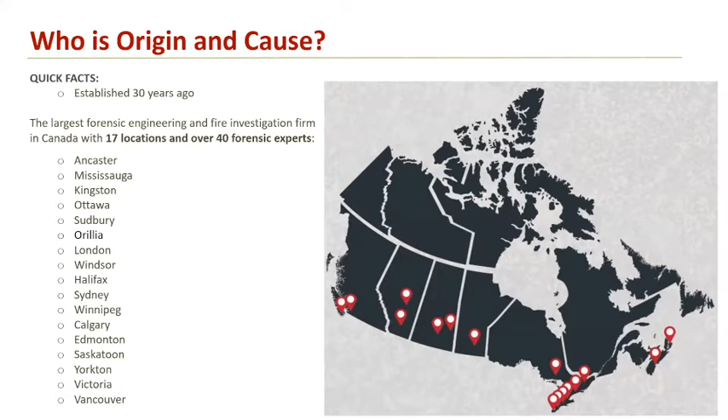I want to quickly cover who Origin and Cause is for folks that haven't used us in the past, or have used us every once in a while. Essentially, Origin and Cause celebrated our 30-year anniversary this year. We're the largest forensic engineering and fire investigation firm in Canada with 17 locations and over 40 forensic experts. You could see those little geo pins on the map as to where we have offices. And we provide services across major engineering disciplines: fire and explosion, structural engineering, materials engineering, chemical engineering, electrical, mechanical, accident reconstruction, drones, and forensic litigation services.

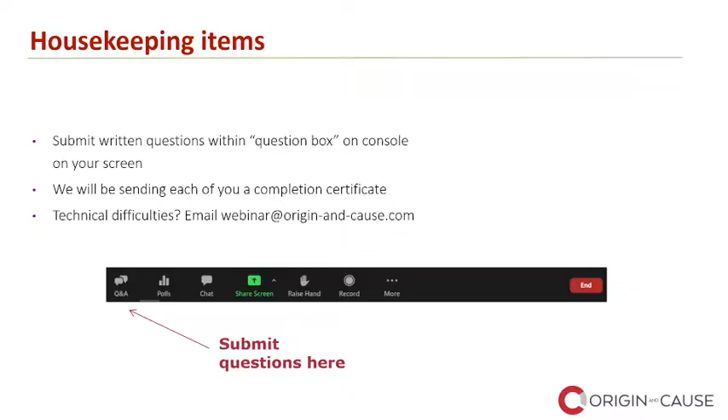Okay, thanks, George. Yeah, no problem. So the first presentation is Forensic Engineering Complex Failure Analysis Investigations.

Do you mind advancing the slide, Dinu, please? So our first speaker is Dinu Matei. He has 28 years of industry and academic experience and has conducted over 2,000 forensic investigations.

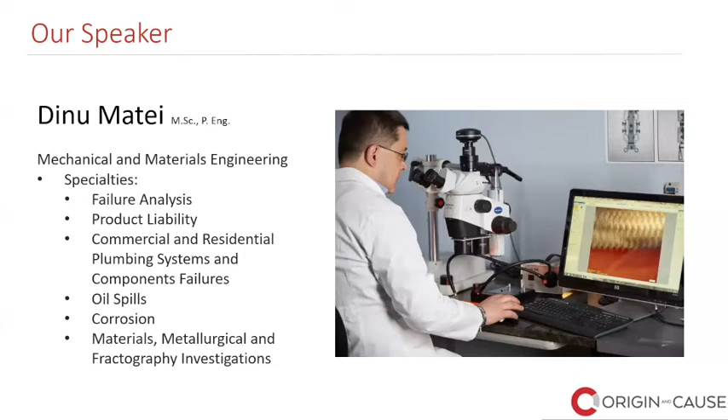Today it will be my pleasure to discuss complex investigations which involve materials failures. Every material, component, appliance, or system is prone to failure. And when it comes to metallic materials, there are only 5 different modes in which they can fail.

Fracture is the separation of an object or material into 2 components under the action of a stress. Fatigue is the weakening of a component or material caused by cyclic loading that results in progressive, brittle, and localized damage. Wear is mechanically induced surface damage that results in the progressive removal of material due to relative motion between that surface and the contacting substances.

Corrosion is the dissolution of the material, which occurs or consists of oxide buildup, rendering the product useless or leading to failure. All metals and alloys are subject to corrosion. The 5th failure mode is creep, also known as cold flow, which is the permanent deformation that increases with time under constant load or stress. Polymeric materials fail in a similar way.

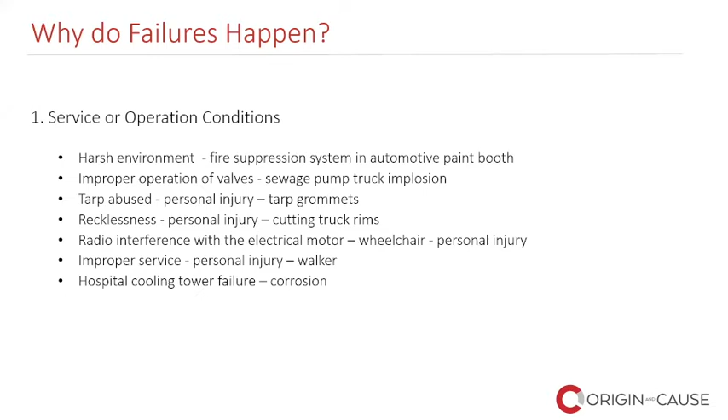A last example is corrosion of a cooling tower at a hospital. The legs were corroded, and the tower was in imminent danger of collapsing.

Improper maintenance. A lot of components need to be properly maintained in order to function properly. A lot of systems need to be maintained in order to function properly. If gears or bearings are not lubricated, they enter into a condition called lubricant starvation, and that could lead to accidents or incidents—for example, wind turbine collapse or crane collapse.

If the bolts of a wheel are not properly torqued, that wheel can separate from the axle.

In a fire suppression system, if the maintenance is not done according to the applicable regulation, that system could fail.

In the case of residential fuel oil storage tanks, if they are not maintained according to applicable code, they can fail due to internal corrosion.

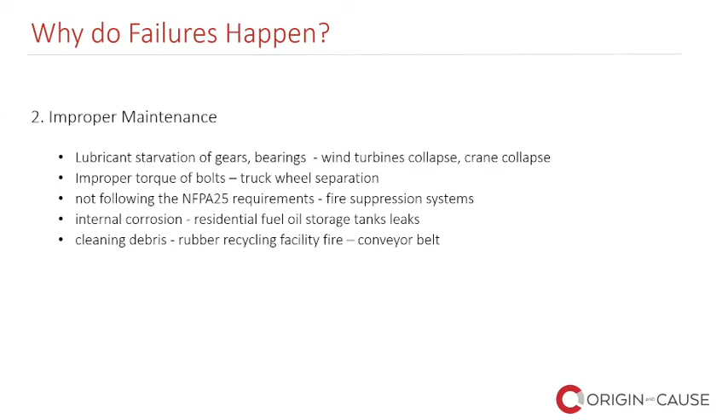An interesting case was a fire at a rubber recycling facility, where the gears from the conveyor belt were contaminated with debris and overheated.

Manufacturing deficiencies—the majority of manufacturers are trying to produce a product which is defect-free, but sometimes deficiencies or defects end up in a product which is available to the consumer.

In this category, I include an aluminum ladder which was purchased from a hardware store and caused a permanent injury to a roofer who fell while climbing the ladder, because the ladder had deficiencies in its castings.

An interesting case, which I will discuss in more detail a little later, involved the collapse of a grain silo spout.

A very interesting and complex case was a commercial pizza oven explosion.

The first time the oven was used, it simply exploded because the stones were made from improper material.

Another interesting case, which was also complex, involved product contamination, in particular chocolate. Long story short, the packaging of the chocolate was not made according to the applicable standards. The manufacturer switched to a different supplier, which provided a package that was substandard. In other words, some of the chemicals used to make the box were not according to the standard.

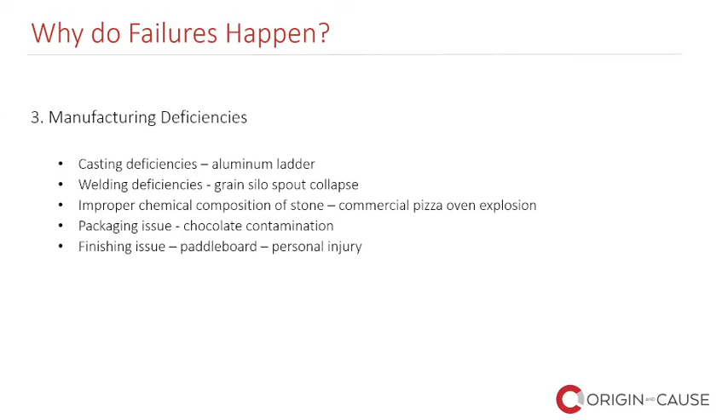A manufacturing deficiency led to another personal injury that involves a paddle board. When the person using the paddle board tried to climb on it, he scratched his chest because the paddle board was not properly finished.

In our investigations, we encountered design deficiencies, and a few examples are a video wall collapse at a theater in downtown Toronto because the video panels were not held together properly. The latches holding the panels were substandard.

We encounter on a daily basis plumbing components and appliances that have design deficiencies. Design deficiencies could lead to personal injuries, like in a miter saw, which was not provided with a safety pin. So the blade dropped and cut the user's fingers.

Another interesting case involving a design deficiency was the collapse of gold mine conveyor anchor bolts, because the load considerations were not taken into consideration properly. The conveyor belt failed.

Installation issues are a leading factor for failures. In case of a fire suppression system, if the system is not properly installed and there's no insulation, or there is a condition which favors the formation of cold air spots, that system could freeze during winter.

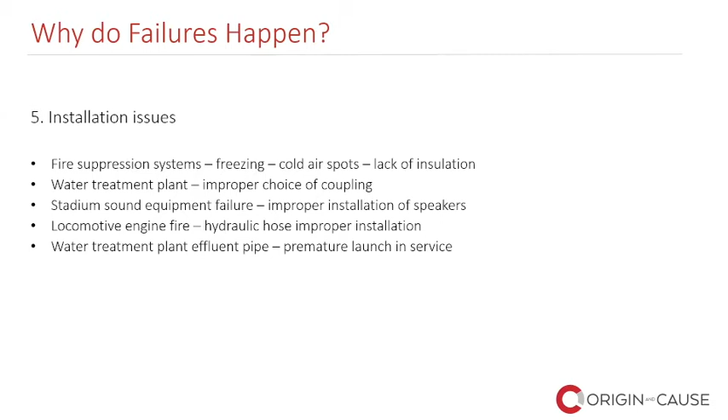And of course, materials and components are subject to wear and tear, especially due to aging. Two examples are a pump used in the food industry, which led to tahini paste contamination. The pump was very old, and particles from the rotors were ending up in the product.

The other example is also a pump, but that pump was associated with oil. Because it was old, the gaskets were brittle and dry, allowing oil to escape, leading to considerable environmental damage.

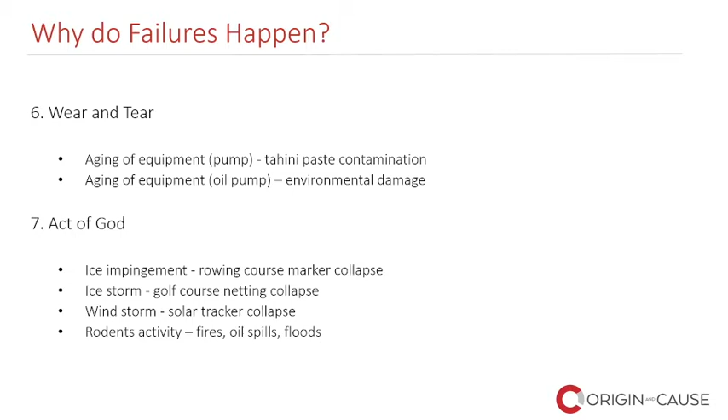And there is the act of God. We have been involved in a rowing course marker collapse due to ice impingement, a golf course netting collapse due to an ice storm, a solar tracker collapse due to windstorms, and we have been involved in fires, oil spills, and floods due to rodent activity.

Some people are negligent or reckless, so their actions could lead to big incidents.

People are leaving their homes at the onset of cold season. They don't turn the thermostat up, or they turn it not high enough. And during winter, when there's nobody home, the pipes freeze, leading to floods.

Oftentimes, when there is a residential oil storage tank located indoors, it is overfilled because the driver who's delivering oil is not paying attention to the equipment.

And we have seen incidents caused with intent, for insurance fraud, break-in entries, or even revenge.

We have seen intentionally flooded homes in order to get money for a free reno project. We have seen orchestrated break-in entries, so people could claim money for personal belongings which were actually not stolen. In a case of revenge, we have seen a gas pipe fitting that was severed with a saw.

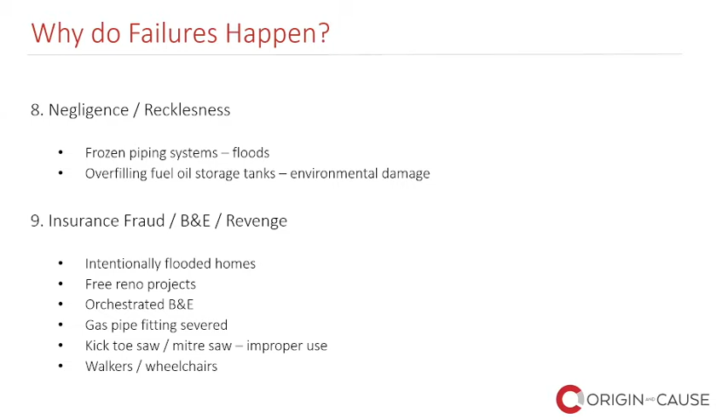And we have seen improper use of tools rented from hardware stores where people got hurt and they claimed that the tool was defective.

Let me take you through a list of important steps a forensic engineer should follow to successfully complete an investigation. Although each investigation is unique, the basic steps are very much the same.

In failure analysis, we say that failure analysis minus analysis equals failure. The basic steps to follow when doing a complex investigation are to gather as much background information as possible: photos from the time of the loss, maintenance records, inspection records, and repairs, if any, in the past.

Try to get an understanding of the circumstances of the event. If possible, interview involved parties like owners, operators, contractors, and witnesses.

Organize your investigation, prepare it and conduct it thoroughly. Make a list with the tasks you have to complete, because you might be involved in a different task and you might lose track of what needs to be done.

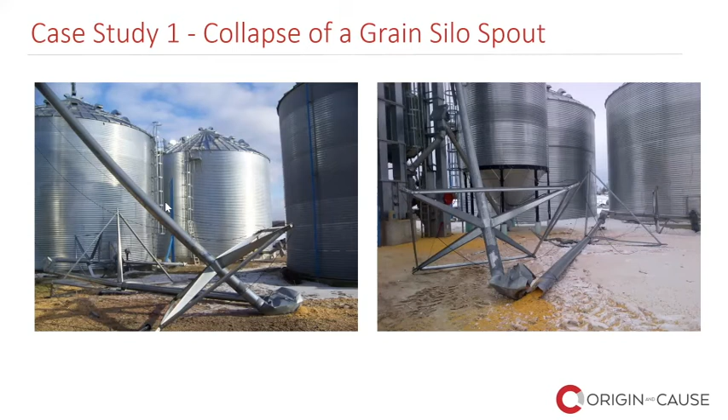In short, a bucket elevator is used to lift grains to a distributor, from which the grains fall through spouts into one or more silos. So actually those spouts are pathways for the grains to be distributed into the silos.

By the time we were assigned to this claim, the weather condition changed and the site condition changed. Most of the components that you saw in the previous slides were removed for storage, so we could not see their layout on site. It must be noted that oftentimes, for various reasons like safety or economical reasons, the site is cleared quickly, and this will make our work a little more difficult.

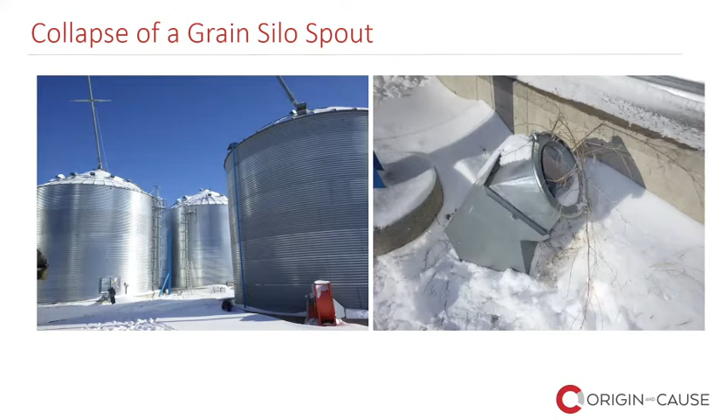The structure was unstable and it was difficult to climb it to see its condition on top. Therefore, we retained the services of industrial climbers, and via radio, I guided them to take important photographs.

Back then, drone technology was not available. However, we have it in our portfolio these days, so in case of a similar incident, we can use our drone to document structures. In these particular images, I noticed a few deficiencies, like crisscrossing cables.

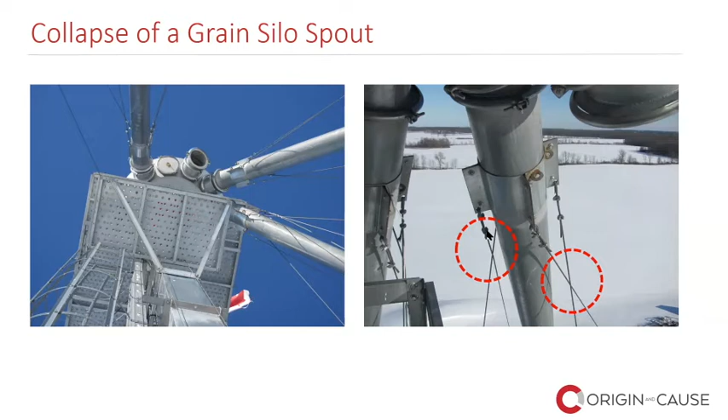And as you can see in the next slide, turnbuckles that are crossing, and cables which are rubbing against the top of the lift.

The evidence was stored in a shed where we had the opportunity to examine it in the presence of representatives from the manufacturer and the installer. The puzzle needed to be solved. The various components needed to be identified to determine how they were installed and what their relationship was with the others.

Following this preliminary examination and identification, relevant evidence was collected and brought to our facility for further examination.

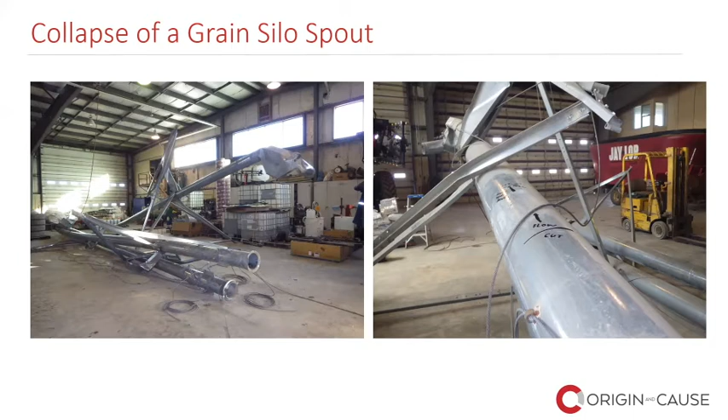One item of interest was a component called a retarder. The retarder is actually what the name says: it's a specially designed box which slowed down the speed of the grains, preventing them from being crushed. So the grains are lifted to the top of the tower and then through the spouts go to their respective silos. If the speed of the grains is too high, then the grains could be crushed.

Each spout was provided with a retarder, which has two pieces of pipe sections welded on each side. The spout was also installed on site using welding, so therefore the retarder has two different welds: one is a manufacturing weld, done at the factory, and one weld done by the installer on site.

It was one of the factory welds that was of interest. You can see by the arrow, this is the factory weld, and this is one of the pipe sections at one of the ends of the retarder.

Together with the other participants in the examinations, we visually looked at the weld and marked locations where samples of interest could be cut and used for further examination.

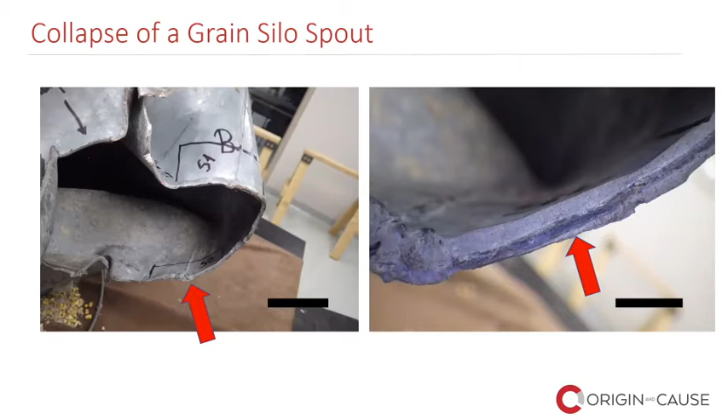Another item of interest was a broken turnbuckle. We wanted to determine whether the turnbuckle was the triggering factor in the failure or it was the effect of the incident.

A turnbuckle, or stretching screw, is a device for adjusting tension or length of cables. They are designed to take only longitudinal loads, not lateral loads. Bending of the turnbuckle in the fracture area suggested that it was subjected to lateral loads. We also noted that the threads were crushed in the section where the turnbuckle was in compression.

In a fractured component, the mating fracture surfaces are usually mirror images of each other. We cut a small sample from the turnbuckle and took it to a powerful microscope called a scanning electron microscope.

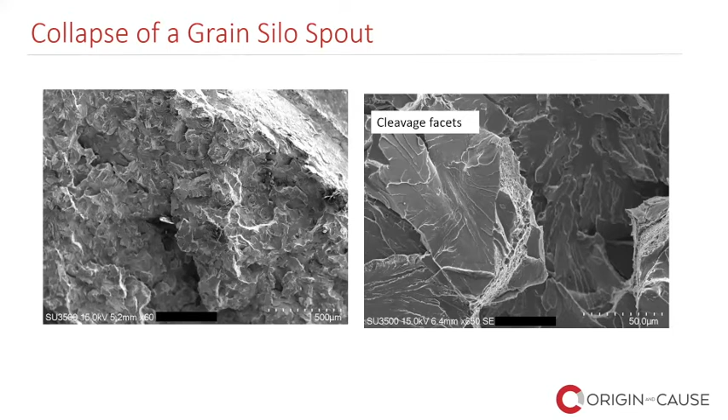Further, we conducted metallurgical evaluation of the turnbuckle in the longitudinal section, and under optical microscope we examined the microstructure. In short, we did not see anything to indicate the turnbuckle was an issue, and we did not see any gross metallurgical deficiencies.

The microstructure was typical for a steel commonly used to make bolts. Chemical analysis indicated again that it's made from a carbon steel, which is also normal for turnbuckle applications. Based on the examination of the turnbuckle and the results obtained, I determined that the turnbuckle was not an issue causing the grain silo spout to collapse.

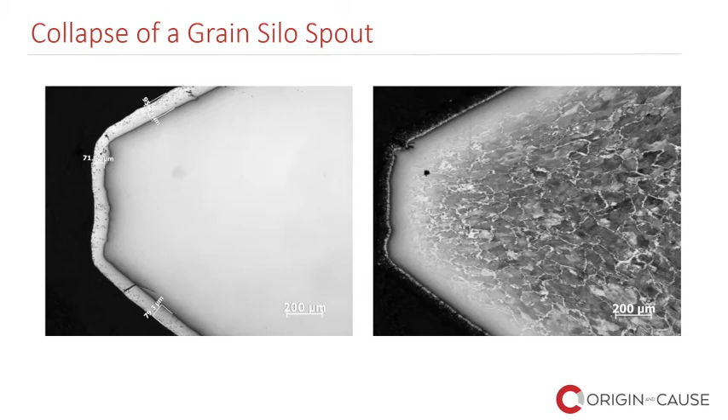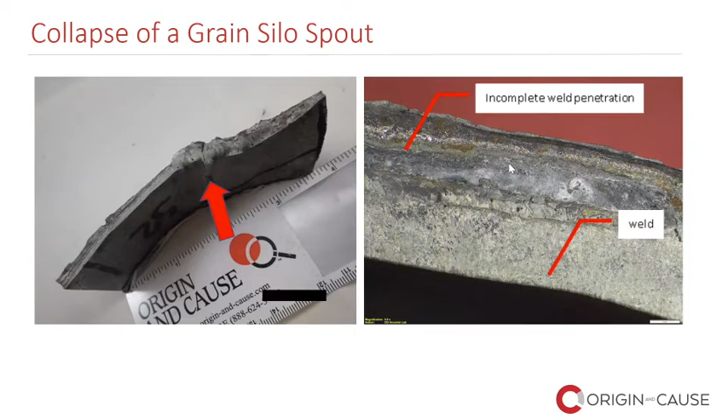As I mentioned earlier, we selected a few weld samples for examination, and one can see with the naked eye there are some problems here. The red arrow points to a large bead, excessive weld bead actually, and the images taken at low power microscope show that the weld did not penetrate throughout the entire wall. So the weld exhibits a deficiency called incomplete weld penetration.

Porosity, not only in welds but in every material, is an undesirable condition because pores can act as stress concentrators and they can reduce the load carrying capability.

Welds are very complex structures, and we analyzed its microstructure and found some porosity. Those black speckles are pores in the weld.

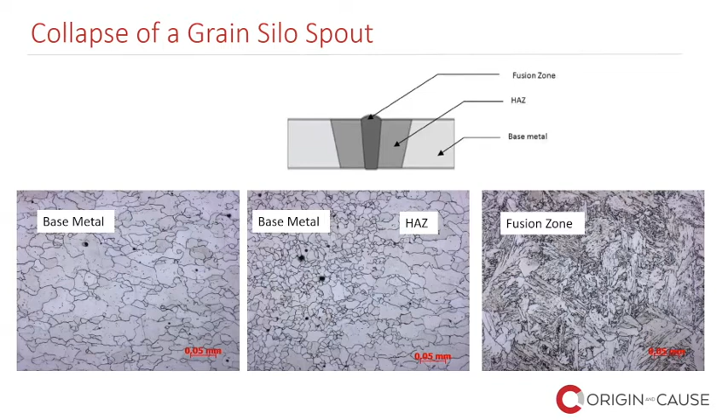Following gathering and analyzing the data, I reached the conclusion that the collapse of the spout was the result of manufacturing deficiencies, namely a substandard weld. There were also other factors adding undesirable stresses to the structure, such as crisscrossing of cables, which was an installation deficiency, and ice buildup due to weather conditions.

However, it must be said that these factors acting alone would not have caused the incident. The main contributing factor to the incident was the substandard weld. And as I mentioned earlier, the turnbuckle failure was not a contributing factor, but the result of the failure.

As far as I know, the matter was settled favorably to our client, which was the insurance carrier for the silo owner.

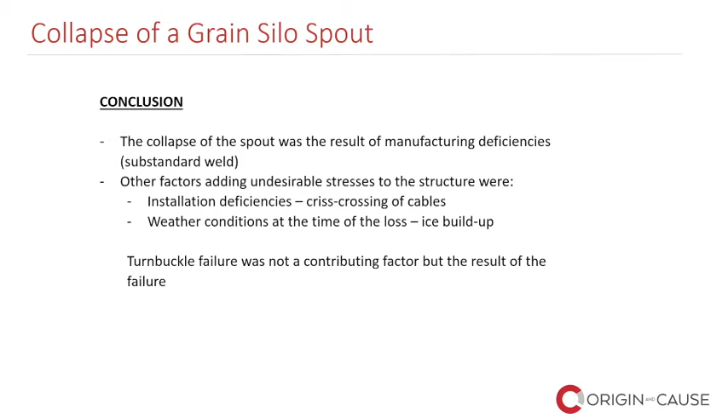I would like to discuss another interesting case I was involved in, namely the collapse of a tower crane. A tower crane collapsed at a construction site, injuring the crane operator. Luckily there were no fatalities, but there was significant property and equipment damage.

Because there was an injured person, the Ministry of Labor was involved, and that made our site access a little more difficult. In this complex investigation, there were multiple parties involved, like the crane owner, the developer, the crane inspector, the Ministry of Labor, and the installer of the crane.

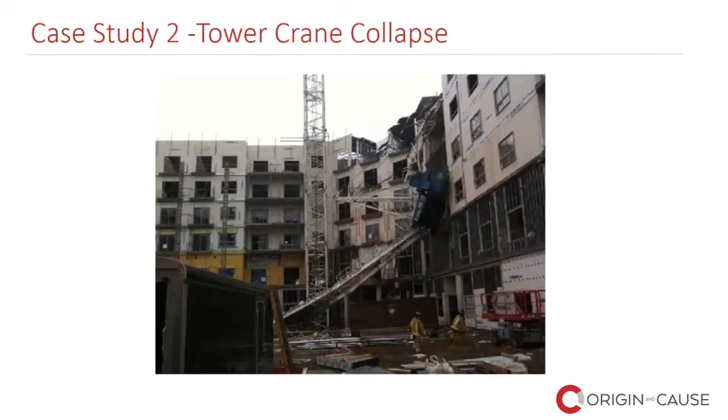What caused the crane to collapse was the failure of a so-called slew ring. A slew ring is a ring which allows the crane to rotate in a horizontal plane. The slew ring is held in place by 48 bolts, and these bolts fractured, which caused the crane to collapse.

Several bolts were retrieved from the site for further lab examinations. However, not all the bolts were found. In case of a tower crane incident, it's important to retrieve the crane logs, which include the inspection, maintenance, and service records. There are very specific requirements on how a tower crane is erected, maintained, and inspected.

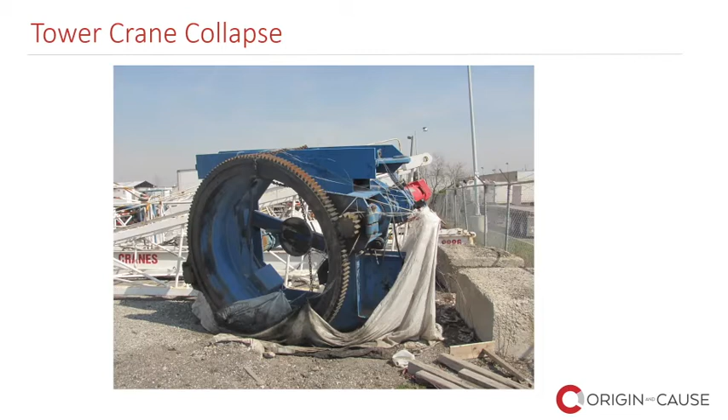Some of the bolts retrieved from the site were labeled and taken to an independent lab for further examination. In examining the fracture surface of the bolts under a low power microscope, I observed that the majority of them exhibit features called beach marks, which are always associated with a fatigue mechanism. All the bolts that I examined exhibited these features, indicating that fatigue was the failure mode for these bolts.

Fatigue of bolts occurs when they are loose or over tightened. Regardless, it's irrelevant for this particular case because both will indicate improper installation. So when the crane was erected, these bolts were not properly tightened. They were either over tightened or too loose.

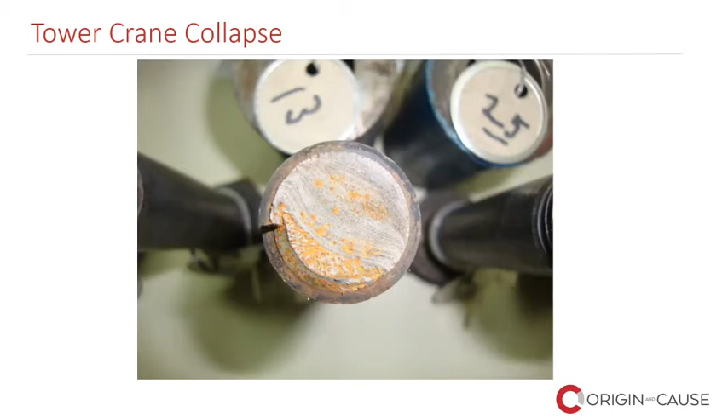Metallurgical evaluation did not produce any evidence of gross metallurgical deficiencies. Chemical analysis revealed that the bolts were manufactured of the required steel grade and according to the crane manufacturer specification.

In conclusion, I said that the collapse of the tower crane was the result of improper installation on site. The bolts securing the slew ring were not properly torqued, and there were no manufacturing deficiencies found in the available fractured bolts. Additional factors that contributed to some degree to the failure was the fact that the incident crane was

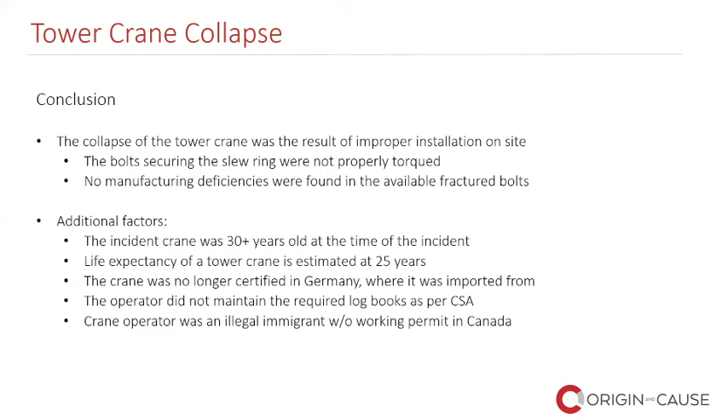30+ years old at the time of the incident, and the life expectancy of a tower crane is estimated to be 25 years. The crane was imported from Germany, where it was no longer certified. The operator did not maintain the required logbooks as per Canadian Standards Association, and the crane operator was an illegal immigrant without a working permit in Canada.

A third case, which I would like to share with you, involves a car accident with a fatality. The vehicle was driven on a straight stretch of road when all of a sudden it went into the oncoming traffic, hitting head first two bikers. One of them died. We were required to examine the components of the vehicle and determine what could have caused the vehicle to lose control and end up in oncoming traffic.

So practically tie rods transmit the movement from the steering wheel to the wheels. In this investigation, the parties involved were the car manufacturer, the service technician who maintained the vehicle, the driver, and the family of the two bikers involved.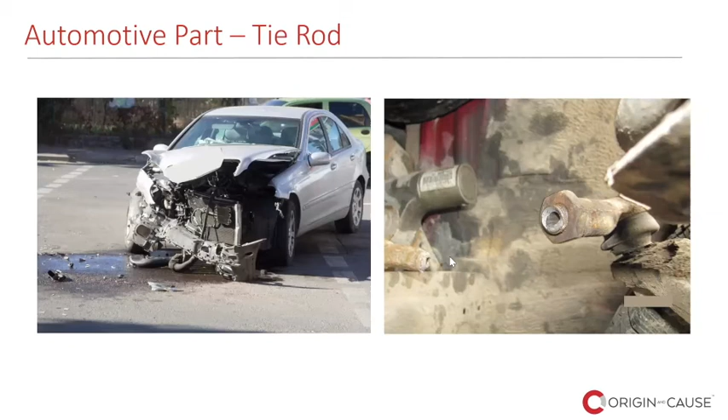And it did not fail as the result of a manufacturing defect. There is a saying in material science that the material failed as intended. It's probably hard to get a good understanding of this saying, and I've heard from many engineers, why are you saying that? I said, well, the component is designed to withstand a certain stress. Beyond that stress, it will eventually fail. It will not fail because of a manufacturing defect. It will fail because it was subjected to an overload. And this was the case

here. So the outcome was that although the driver maintained his innocence and claimed that he did not remember the minutes before the accident, and that it was a defect in the vehicle, he was held accountable for the tragedy.

So as I mentioned earlier, the tie rod failed as intended. If the tie rod would have been defective, it would fail in a different mode, and there would be significant tells on the fracture surface to indicate that.

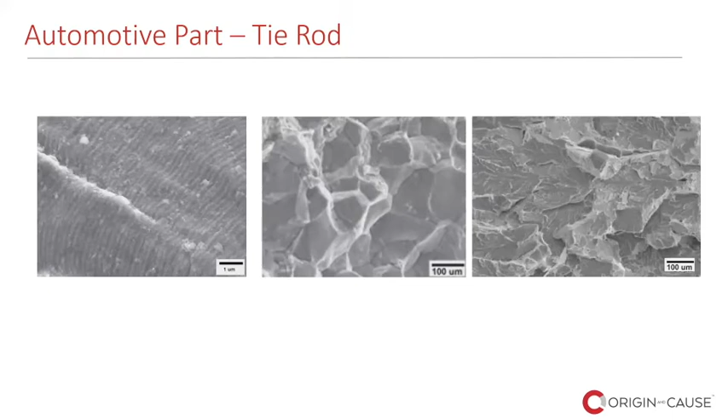A complex case that I was involved in involved a chair with a welded frame whose failure led to a personal injury.

These chairs were installed in a public place, and a parent was sitting on the chair holding his baby over his shoulder. So he was rocking the chair, and all of a sudden the welds sustaining the seat failed, and the baby fell headfirst to the ground.

The incident occurred without warning, and we were asked to examine and provide an independent engineering opinion on the most probable cause for the incident. We collected the incident chair, and we also collected a few exemplar ones for comparison.

Of course, the owner of the place where the incident happened was involved. The manufacturer of the chair was also involved, and the distributor of the chairs was also involved, each sending their own technical expert to participate in the joint examination.

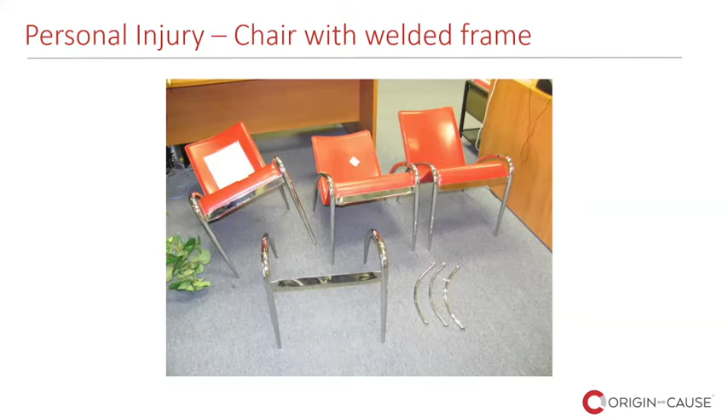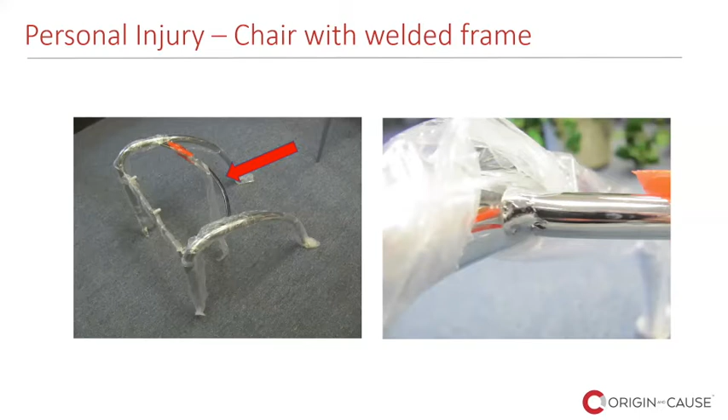And on the incident chair, both welds gave way. You can see on one side the collapsed seat, and on the other the remaining frame with the locations of the failed welds.

We documented the frame and the welds, and we took them for examination under the stereo microscope and later to a scanning electron microscope.

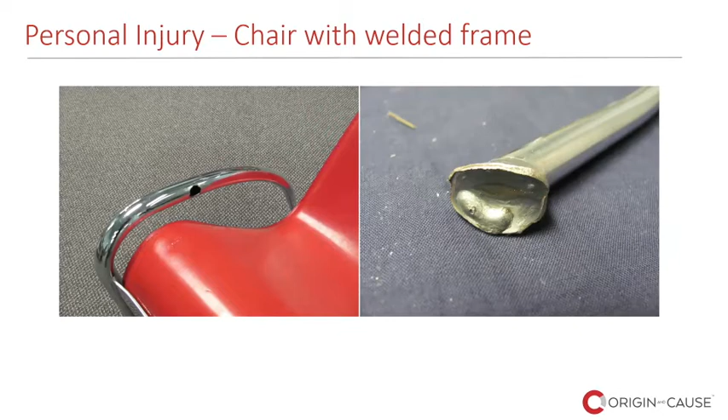The bars with the two failed welds are shown in these images, and one can see that the welds contain large porosity and inclusions. They are undesirable because they act as stress concentrators and they decrease the load carrying capability.

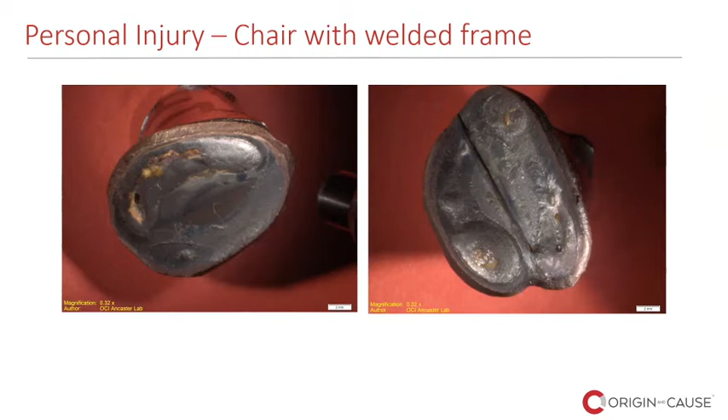One of the welds was taken for examination under the scanning electron microscope, which confirmed the presence of large pores and non-metallic inclusions. These deficiencies are significant because they act as stress concentrators and reduce the load carrying capability of the weld.

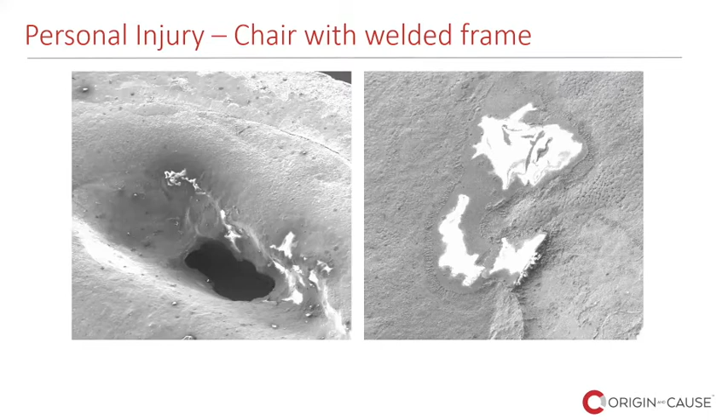My conclusion was that the collapse of the chair and the accident were the results of a design deficiency and a manufacturing deficiency. As far as I know, the matter was settled out of court and in favor of the plaintiff. As a result of our investigation, 800 similar chairs from nationwide locations were removed from service.

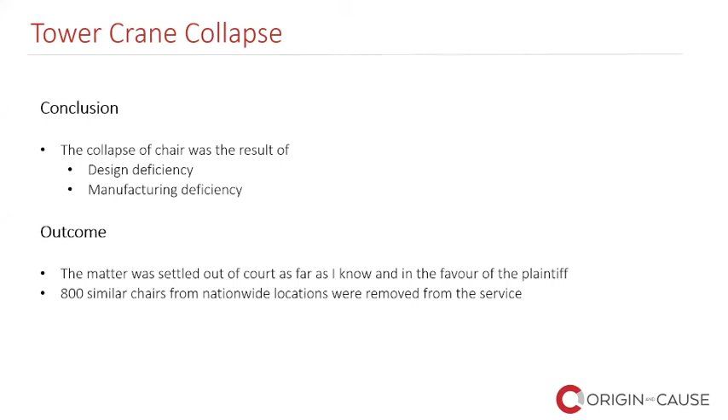This concludes my presentation. And if you have any questions, feel free to reach out to me, and if I can, it will be my pleasure to answer.

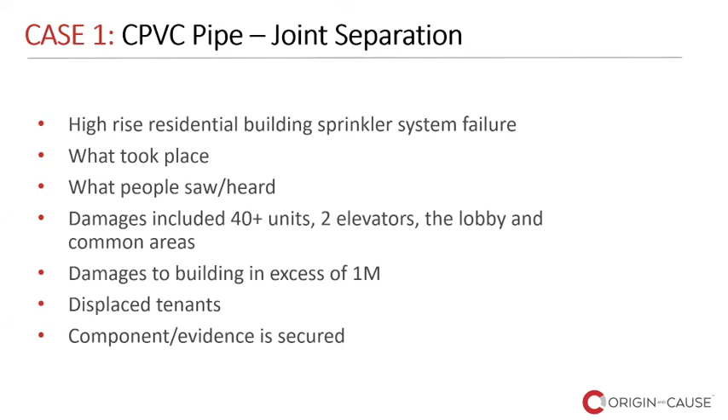One of the key aspects here is that the component, the evidence, was secured. One thing to keep in mind with all sprinkler systems is that they are required to be put back in service very quickly. So whenever you get one of these claims, you have to make sure that somebody goes out and documents them properly. It's best if you have someone who knows what to look for, but if that's not possible, the same day or early next day, then at least yourself or another adjuster needs to document and secure the components.

So when I go on site in a case like this, I typically inspect the entire sprinkler system and document the conditions and the settings that it is set to. Again, attending the site is very, very important because oftentimes the cause of failure is not in the evidence that you secure, so the broken part or the separated piece, but elsewhere in the system or in the building.

An example of that can be a system that has an issue with a jockey pump. The jockey pump maintains the pressure in the system, and then whenever the main pump activates, it generates so much pressure that something bursts along the system. So all of those records, all of that information from those on site is relevant and key to determine the root cause of the issue.

A complex investigation in sprinkler systems can develop from almost every fire sprinkler component, namely the heads, the metal couplings, steel or polymer piping, and in this case today, the polymer piping failure is what we're going to be looking at.

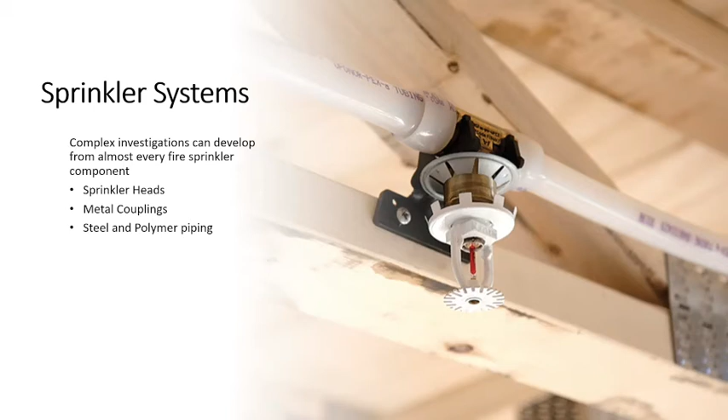In the particular case we're going to be looking at, the adjuster in this file quickly secured what they believed was pertinent evidence and provided me access to the scene.

So here's the separated pipe. You can see this was a 1.5 inch pipe, and it separated without any warning. This was within the ceiling cavity, so nobody could see it beforehand. The repairs of the pipe were completed right away to get the system back into operation and give fire protection to the entire building again. What I received as evidence was the failed pipe only.

Not only is the failed component important, I went to the site in this case, and the result of my site examination allowed me to eliminate any other potential causes for this loss. So I knew that the failed pipe joint was the smoking gun in this investigation.

As you can see here, this would be a sample of what a joint looks like, connected to a sprinkler head. What you see here as a red substance connecting the pipe pieces together is the contact cement, or the glue, used to join the pipes and fittings. This is one of the major issues we encounter with systems that use polymer pipes, where the joint sections can separate.

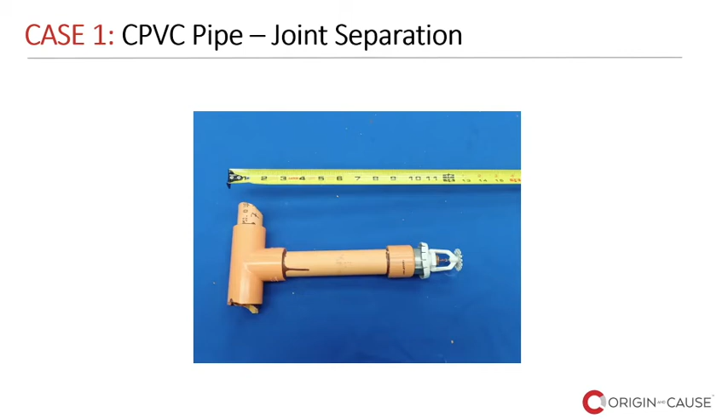A failure like the one I'm showing can be the result of several reasons. One would be improper installation, two, defective solvent cement or glue, three, defective pipe or fitting, and four, excessive internal fluid pressure, in this case water. This can be the static pressure from the sprinkler system itself, or an issue with the pumps that can trigger an instantaneous increase in pressure.

So as you can see, this can be a complex investigation based on the many possible scenarios that need to be explored. For a failure that appears simple, you can now see that there may be a large number of parties and experts attending this investigation. This adds to the complexity as well, because the more parties involved, the more the investigations tend to last, and the more things we have to go through to satisfy all the experts in reaching common ground. Even then, sometimes we don't reach a common ground during the investigations, and that's when you see different reports.

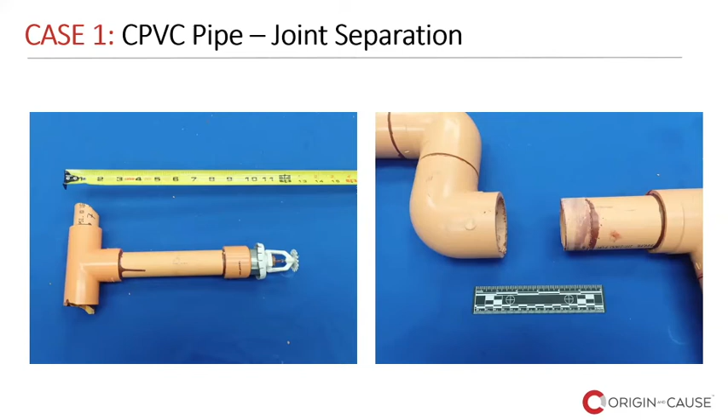There was also inadequate application of the contact cement. There was insufficient insertion depth, which is one of the most important steps, as there are several factors that play a role in the strength of the joint based on how deep it is inserted into the socket of the fitting.

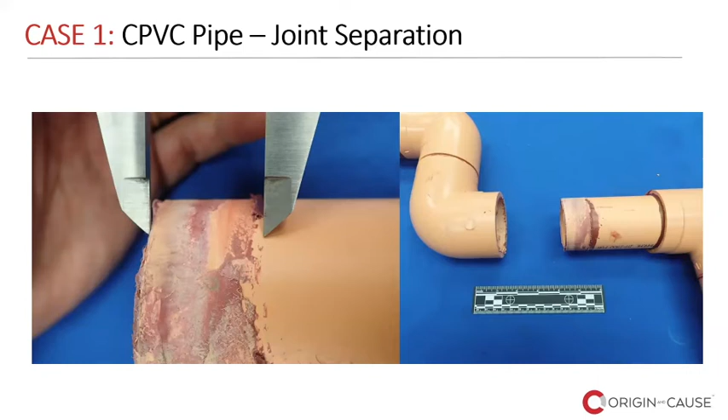So I'm showing here in the picture on the left what we measured as the insertion depth, as well as how the contact cement was applied onto that pipe, and how it didn't make good contact on all the surfaces.

So a failure like this one could be the result of a number of reasons. Like I said before, improper installation, defective cement, defective pipe or fitting, or excessive internal fluid pressure.

In this investigation, the inspection showed that we have to look into the measurements of the components, but also review codes and standards, as well as the manufacturer instructions. This helps during the analysis develop our hypothesis, which will ultimately lead to a conclusion, or to identify other potential factors that need to be looked into.

So based on my analysis, I thought that the cause of failure could be the result of installation issues, or the contact cement being out of specification. So immediately I contacted my client, and then we decided to arrange for a joint inspection with all the other parties. In this case, it was the installer, the pipe and contact cement manufacturer, and the fire protection company who did the actual installation.

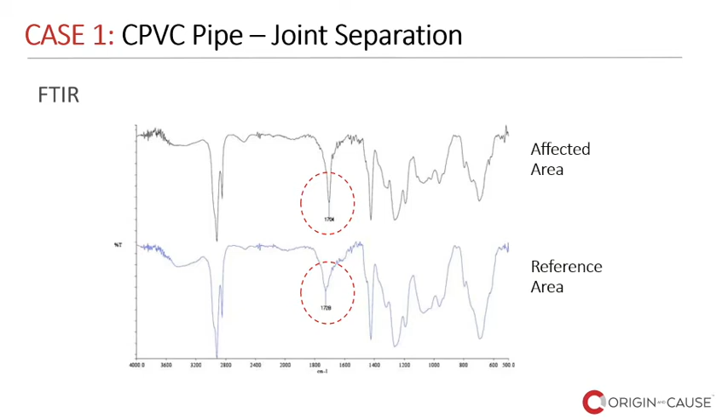Or what contaminants can be on the surface, or in this case, whether the contact cement had degraded or was degraded prior to it being put in use. We were able to determine that by looking at the blobs of contact cement left over on the pipe.

Or we can use more complex and specific techniques such as GCMS, gas chromatography mass spectrometry, to identify specific components and the quantity of those that can be detrimental to the materials, or in this case, the contact cement.

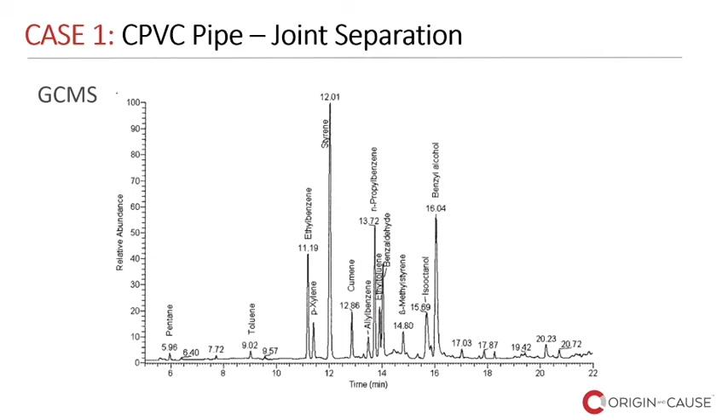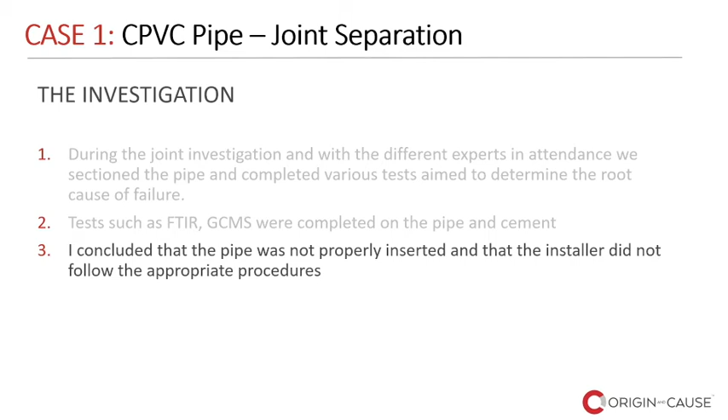In this case, we did not find any components or deviations large enough to support a hypothesis of the solvent cement being defective. But we did find a lot of issues with the insertion depth and the cutting of the pipe, and all of that together led us to conclude that the installation itself was the contributing factor, or the only contributing factor, to the failure, and that the installer did not follow the appropriate procedures. As such, the improper installation was the cause of this loss.

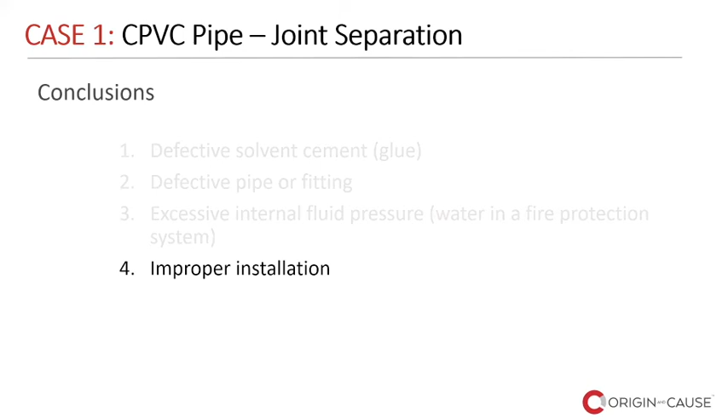So as you can see, it was a relatively long process to go through all of the potential causes and eliminate those that were not directly relevant. Those that could have had a potential issue or effect were examined in detail so that we could rule them out for sure and leave only one of the causes as the root cause of the failure.

They most likely are related to a couple of things. Well, freezing - but freezing can be easily addressed or understood if there are freezing conditions in the building. But if not, then ESC can most likely be the cause, and this requires specialized equipment to prove. I just wanted you to keep an eye on it and see what it looks like, and if it serves to open up a conversation for later on, that'd be great as well.

I can answer any questions you may have.

Finally, I just wanted to mention that the lesson we learned on this case was the importance of properly securing the evidence and documenting the chain of custody. In this case, the adjuster did a great job at this - he quickly secured all the important components, and they clearly played a good role.

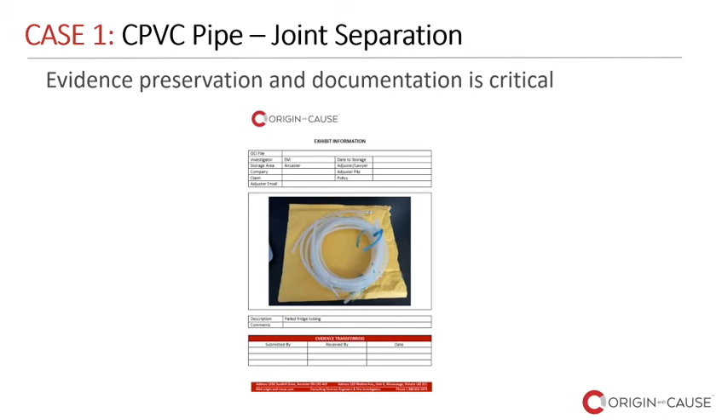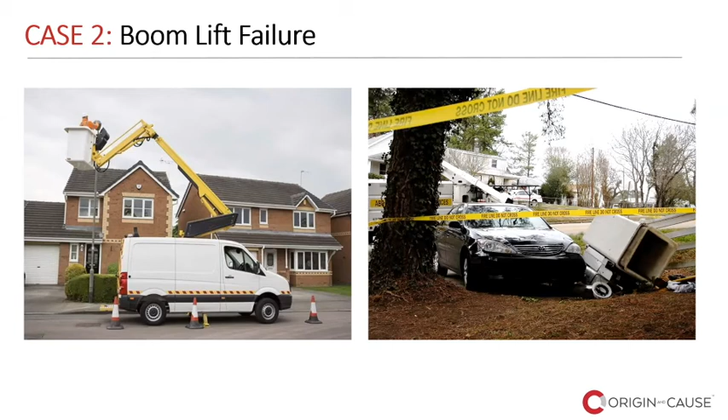So with that, I'm going to move on to my second case study, which speaks of a boom lift failure with a personal injury. I want to show that the contractor in this case was working on a boom lift when it suddenly failed. The bucket fell to the ground, the boom failed, and the contractor on the bucket suffered injuries. In this particular case, the failure we focused on was the turntable on that boom lift.

As I'm showing here, the turntable separated, and the cause for that separation was that all of the bolts securing it together failed. These two images here are a representation of what that would look like when it was installed.

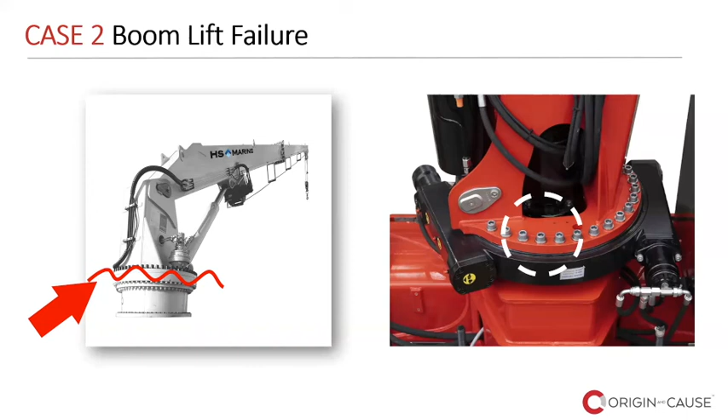I was basically among a group of experts, which included the lift manufacturer, the lift installer, the bolt manufacturer - for which I was retained on their behalf - the maintenance company, and obviously the plaintiff who suffered the damages.

As I mentioned before, the bolts fractured and caused the boom to fail. Here I'm showing you one of the failed bolts and one of the intact bolts from an exemplar, or sister, vehicle.

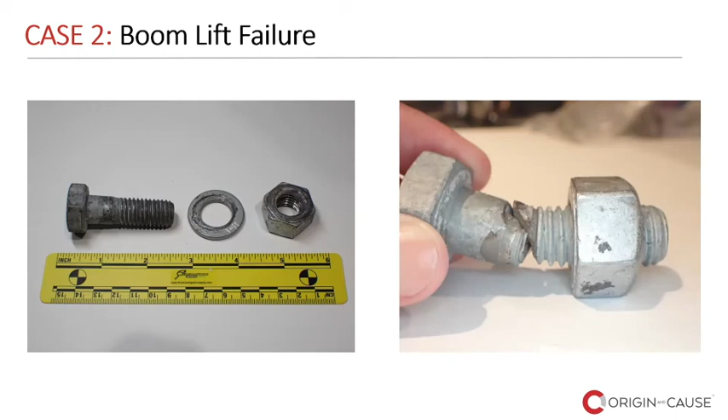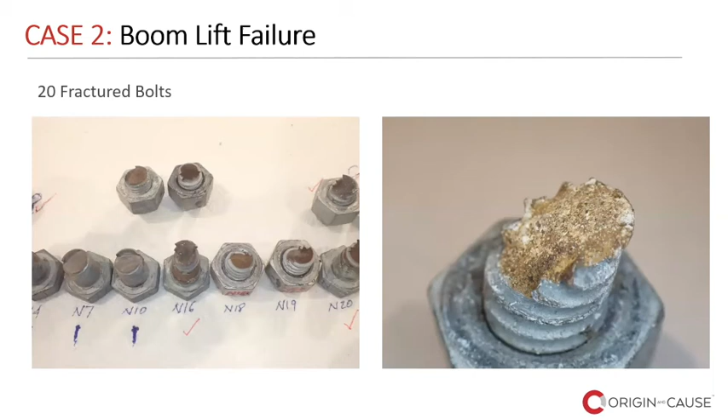And these are some of the other failed bolts. As you can see, some of them look very jagged and rough, and some look more smooth. Going into those that look smooth, we can see that they show signs which are an indication that fatigue took place there. In this case, only 5 of the bolts fatigued. We had over 20 bolts, and 5 of those fatigued.

And fatigue is a failure, as Dino mentioned in his presentation before, that typically results from other circumstances. That can be in the manufacturing of the component, the bolt in this case, the design of the component, the boom lift in this case, say if the loads are not well calculated, in the installation, or in the maintenance of it.

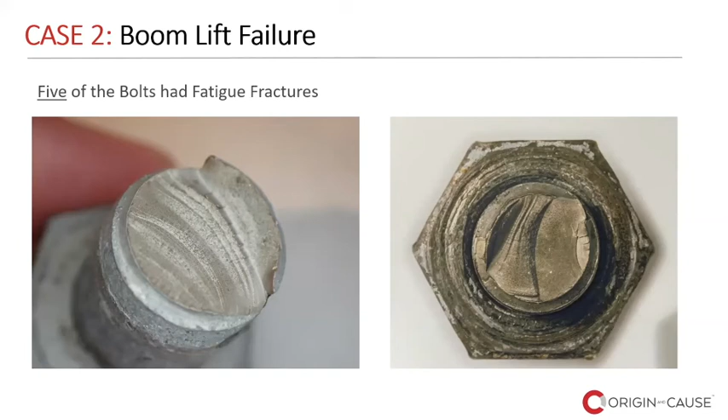Just to give you a quick run-by on the fatigue, what you can see here on the left picture is those marks that look like a thumbnail mark, and those are basically an indication of a crack that develops in the material over a period of time. Eventually, the crack is big enough so that the component doesn't have enough strength, and the crack completes, and the bolt in this case fails by fracture.

So, what are the potential causes? Like I mentioned before, myself and the other experts in this joint examination were looking at all the potential causes and analyzing them independently to determine whether they played a role in this failure or were just circumstantial causes.

So one of the things we looked at was improper design, whether the number of bolts was insufficient, or the bolts were too small or not strong enough, whether the bolts were defective, whether the installation was inadequate, or whether the maintenance wasn't done properly.

In terms of testing, what we did was initially typical for a metallurgical investigation, which is microscopy, metallography, hardness, tensile test, and chemistry. This was to get an idea of what these bolts were made of, and whether there were any issues with them internally.

The material strength in a bolt can meet the structural loads, but in this case we proved that the material was strong enough to resist the load or the static loads of the component, the boom lift. But in this story, there were several other factors that played a role in the design.

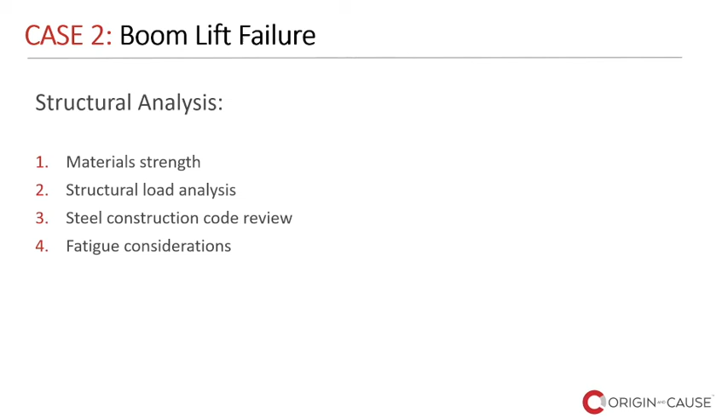One of the other things we did, obviously, was the structural analysis, which reviewed all of these, including the structural loads and the code review. In my particular analysis, I was able to determine that the bolts met the requirements for their specification, their standard.

I also concluded that the design of the boom lift met the minimum structural requirements for its intended loads, but it may have failed to account for cyclical loads caused by the vehicle it was mounted on, or the loads applied during operation. So in short, I was able to prove that the material strength was enough, but may not have been good enough or well within the safety requirements in the structural codes.

And then the fatigue in those bolts was likely the result of improper torquing during installation, or that these bolts were not retorqued, or that they were not receiving the proper maintenance that they should have had. So as I mentioned before, bolts are more likely to fatigue as a result of being loose than when they are properly torqued. And in this particular case, the installation instructions did not account for retorquing the bolts, nor did the installer include that in their procedures.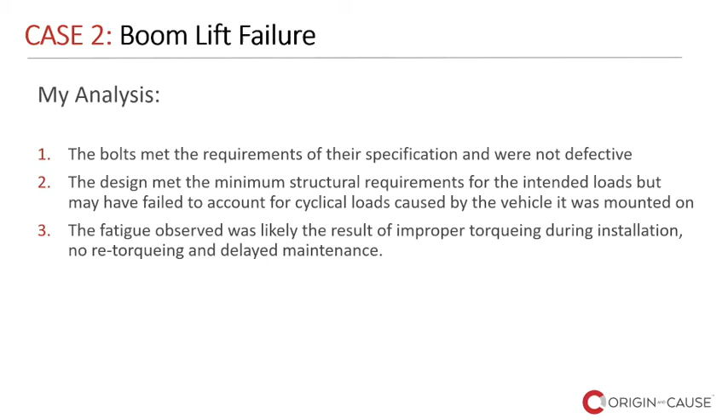It's also critical to point out that me and the other experts in this examination were looking at all the potential causes and trying to determine whether they played a role in the failure.

But in the end, the torquing, or the initial torquing and the retorquing, was clear to all the parties, as the physical evidence was showing. We basically were on the same ground, and I was able to conclude that this was a matter of inadequate installation and a lack of timely maintenance.

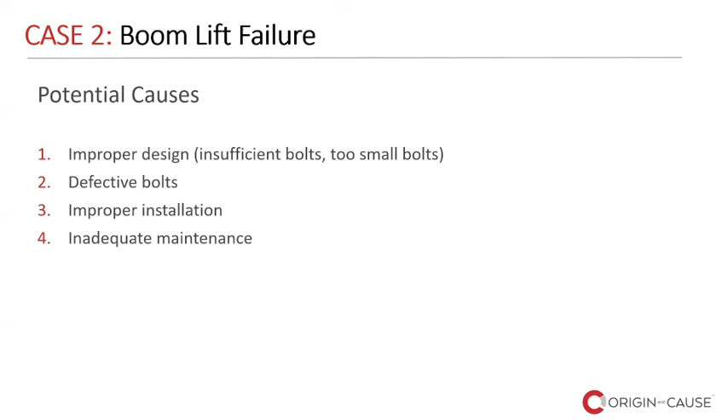So after all the hard work and analysis we completed, my client, which was the bolt manufacturer, was let go of the action, as we proved that the manufacturer and the bolt was not a contributing factor to this cause or to this loss.

What we learned in this investigation is that when it comes to material failures, determining the cause of the failure or eliminating other potential causes of failure often requires sophisticated equipment and joint destructive examinations.

For about almost 10 years, I worked in failure investigations for manufacturing companies and aerospace. Oftentimes I used to get clients that came and asked me if I could tell them right away what had happened. It's interesting, because obviously what happened is that the part broke, but to actually find the root cause of that, we have to do some work.

In some cases, very detailed work with sophisticated microscopes and techniques to find out the exact cause.

Also, it's important to note that liability could affect any other involved parties if they're not properly represented. That's clear sometimes when some of the experts see things in a different way from the rest. So it's a good idea to have someone there who's representing your side of the story, making sure that all of the stones are turned to look for the right cause.

It's case study 3, in which I talk about corrosion of stainless steel wires in water connectors.

So when you hear water connectors, you probably think of connectors to your faucet or to your toilet, which are relatively small. The amount of water that comes out of them is relatively small, but they can also create a huge amount of damage depending on where they are in the building.

When I look at different connectors like these, I not only focus on the smaller connectors, but I also see the larger ones, like the one here on the right, which is a 6-inch flexible connector in a riser for a high-rise building. Those have the same principles and the same issues that we see with the smaller connectors.

So basically, these are a hose, either a rubber hose or some other type of internal polymeric hose, that has a braided stainless steel wire on the outside. As you can imagine, depending on the pressures, the inner rubber or polymeric hose is not capable of withstanding the internal pressure all by itself. That's why the braided wire material is added on the outside.

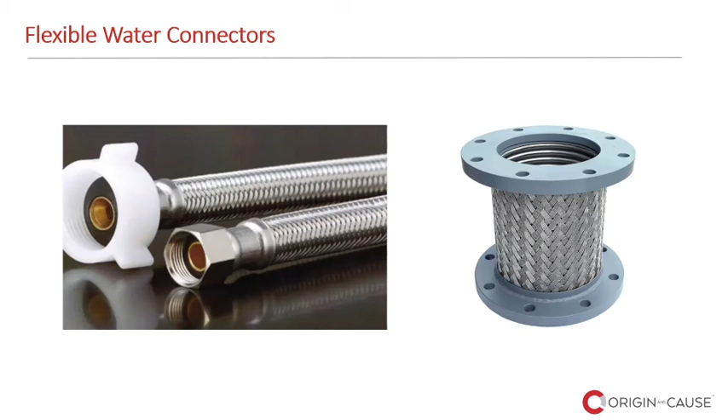Here I show one of these connectors that failed. The stainless steel wire braids failed. You can see on the picture at the bottom there's a slit-like opening on the rubber, and that's where the water came out. Once the metal wires break, there's nothing holding the rubber hose, and it bulges and perforates.

In this case, I was retained on behalf of the plaintiff, the unit owner, but I have seen this issue from all angles and represented all different parties that get involved—the manufacturer, the installer, you name it.

Typically there are three types of corrosion that affect the wires on a connector like this: general corrosion, which is just surface corrosion, that brown rusty stuff we see whenever steel is rusting; and pitting corrosion, which shows as tiny pits or small surface perforations in the material. This is much harder to see by visual inspection alone.

It typically occurs as a result of some of the chemicals that get in contact with the surface of the wires. The third type, very common here, is stress corrosion cracking, which shows as cracks that grow into the wires.

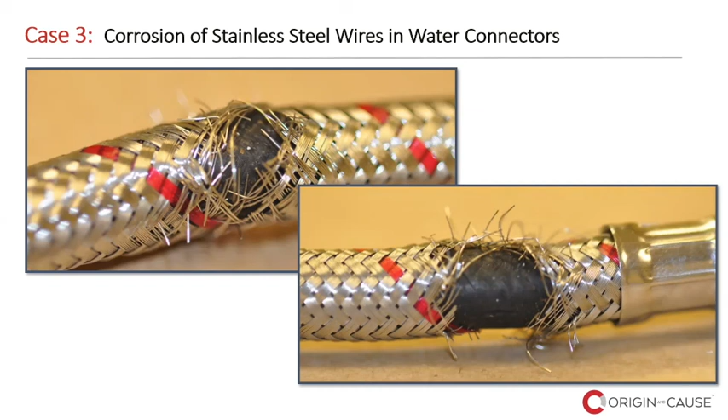In this case, I was among a group of experts, which included the manufacturer of the water connector, from overseas, the wire manufacturer, also from overseas, the maintenance contractor, the property management, the Canadian supplier, the installer, and the plaintiff itself, the unit owner.

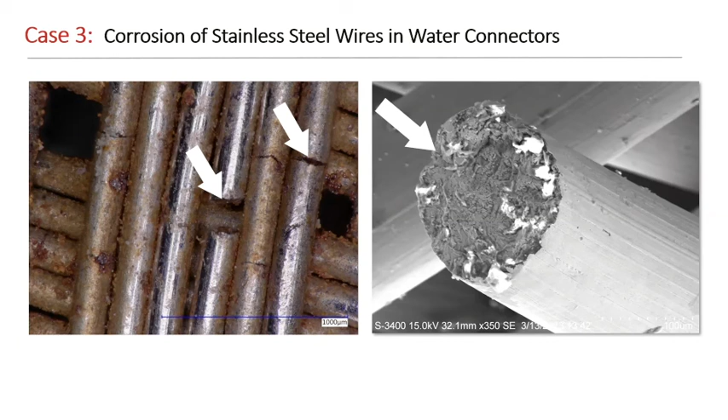As I was saying, these failures can present challenges when trying to prove the root cause, even when using the right tools and equipment. However, in cases like this, going the whole nine yards, or going the extra mile, proves to be fantastic for providing subrogation opportunities in these losses.

As you can see, there's not a whole lot of material loss—not a whole lot of loss due to surface corrosion. The corrosion itself was just very rapid, very invasive, going into the material itself.

In this case, the root cause of this type of corrosion was stress corrosion cracking aided by pitting. And it points to the hoses or the wires being attacked by chemicals, which caused the breakdown and the starting of the pitting and the stress corrosion cracking.

However, there are some times when steps in the manufacturing process are not done correctly, which makes these wires more susceptible to this type of failure, where some identical wires would not fail, or what looked like an identical wire would not fail.

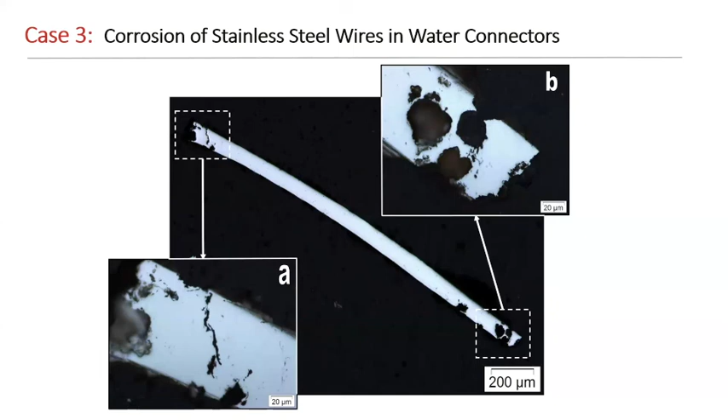A wire that hasn't been manufactured properly would show, for instance, like I'm showing in this case, some areas where the composition is different, or improper heat treatment, which means even though you have the right composition, you have the wrong microstructure, and that makes it easier to fail as a result of one of these corrosion types.

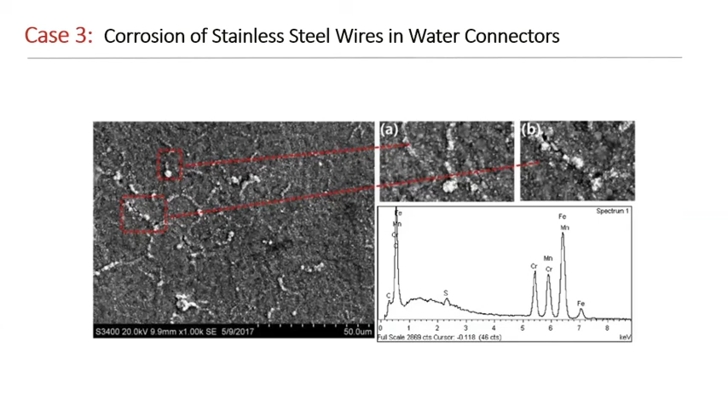In my analysis, I was able to show that the wire composition slightly deviated from what the material specification was supposed to be, and that allowed for localized corrosion to develop much easier. It wasn't completely different from what it should have been, but it was enough to allow for corrosion to start.

Also, the wires or the component, the connector, showed small but clear signs of corrosion. In my opinion, this connector could have been inspected and replaced since it was over 10 years old.

One of the things that happened in this case is that the security and property management could not find the shut-off valve for this particular bathroom. This bathroom was in the common areas of the building, and they had to shut off the water for the entire building. This process took a long time, and therefore a lot of water escaped through the building. Had the property management had better procedures, they could have substantially mitigated the resulting damages.

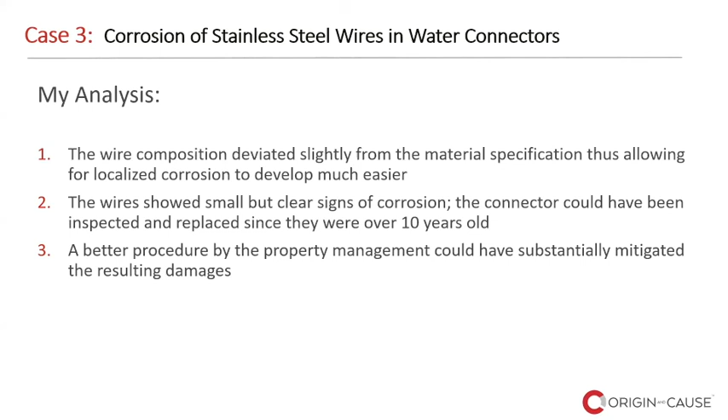So as you can see, even though the root cause of the failure was a material issue, and chemicals that can be debatable as to whether they are acceptable or normally used in bathroom cleaning applications, I believe the manufacturer should account for that.

There were other considerations in this file, in this claim, that my client took on and was able to subrogate against those defendants.

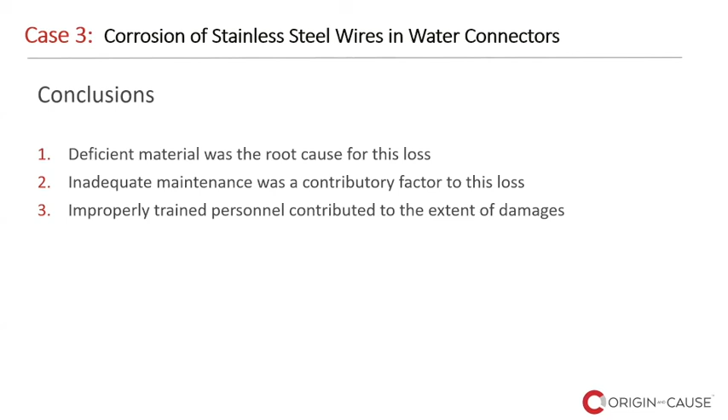In my conclusions, the deficient material was the root cause, but the inadequate maintenance was also a contributory factor, and the improperly trained personnel contributed to the extent of damages.

What I learned from this file, this investigation, is that when it comes to subrogation involving material failures, identifying other contributory factors is as important as determining the root cause of failure.

Remember that the manufacturer was from overseas, so my client explained to me that it was very difficult to recover from the manufacturer, but at least the share attributed to the maintenance contractor and the property management, he was able to work with.

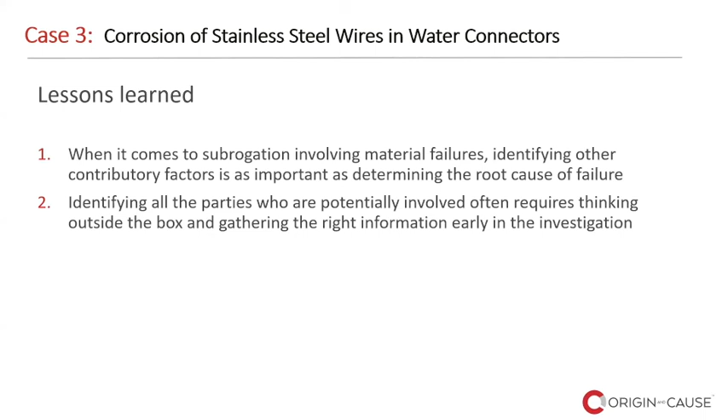Obviously identifying all the parties is key, and it oftentimes requires thinking outside the box and gathering the right information early on in the investigation. That's key. With that, I conclude my presentation.